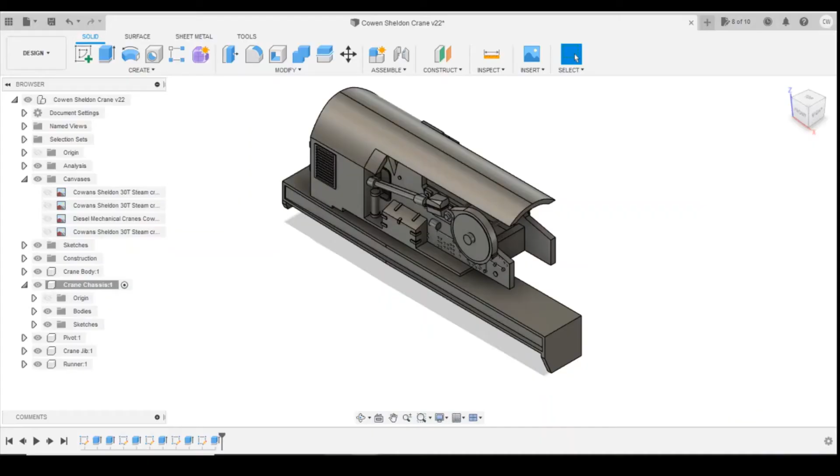So if we jump into Fusion, we'll scroll this around to look side on. We'll make sure we've got this radio button checked for crane chassis, so we don't make that mistake again, and we'll look at the plan we've got here.

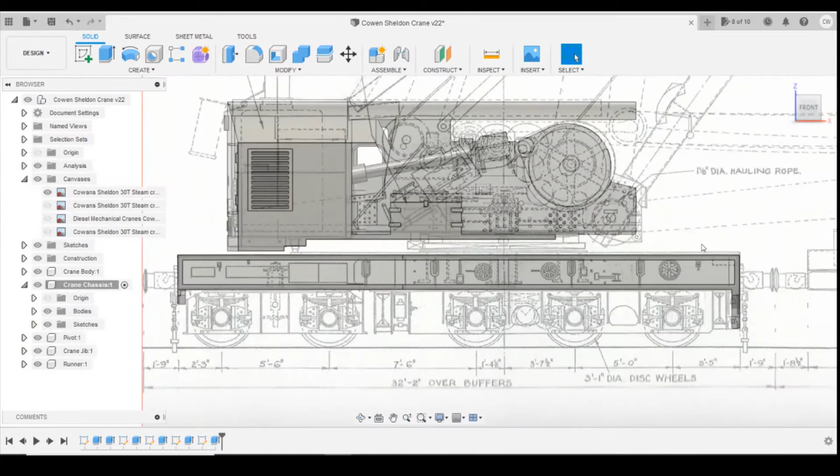On the plan we can see there's one of the supporting members here, looks like there's another one here, but the one at the front doesn't look to be drawn, or if it is, it's potentially this one right at the very end. But looking at the pictures, it's actually offset by about a foot, so I don't think it's drawn in the right place, or if that's it at all.

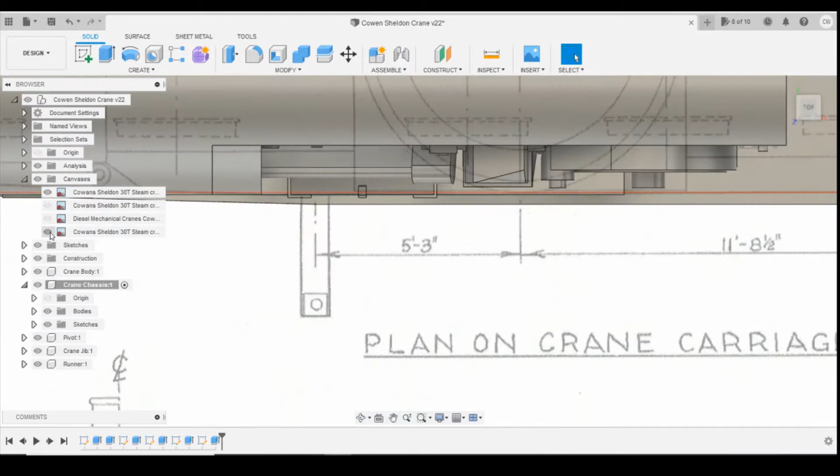One thing I am going to deviate slightly from - if we look top down, I think it was that one. We've got the position of our bend here. Actually, I'm not sure if it's in the right place entirely. I think it might need to be further back, because I think it's going to probably be starting about here where that support member is, and this position here I think is actually the jack.

So I think I'm going to have to go back into the sketch and just change this. I'm going to roll this back slightly to... I think it's this one here, yeah. I'm going to edit that sketch, just reduce this down. Let's try 22mm.

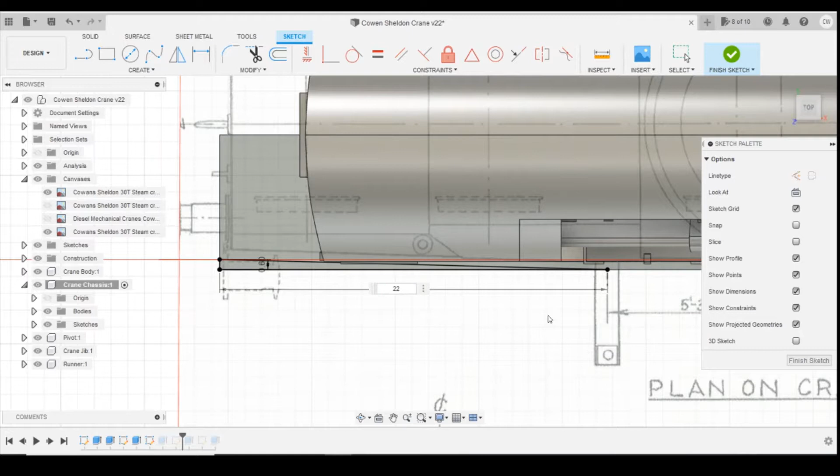Everything beyond that point should still be fine because this is still staying in the same place. I think by moving that back, that enables us to have this beam here in the right place, because looking at the pictures, it definitely doesn't look like it's bending at that point. I think it's slightly afterwards. So I'm much happier with that position.

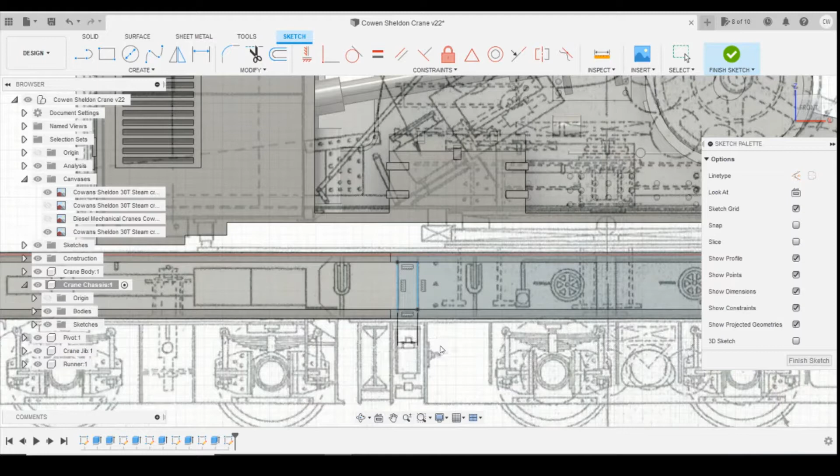So we'll start off by creating a sketch. If you look at the photos, they are level with the front, so we can just sketch on this front face here, and do a simple rectangle to fill these in. So there's one there, and we'll define that as 1.1, and the distance from there to there as 1.35.

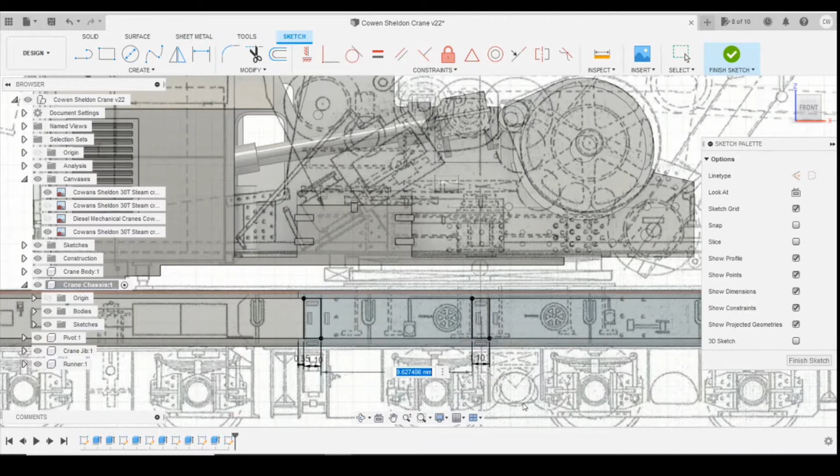We can draw the next one, I think is here, and define that 1.1 again. As I say, on the last one, we're going to have to just work from photographs, so it looks like it's in line where the jacking post is, about this sort of position here.

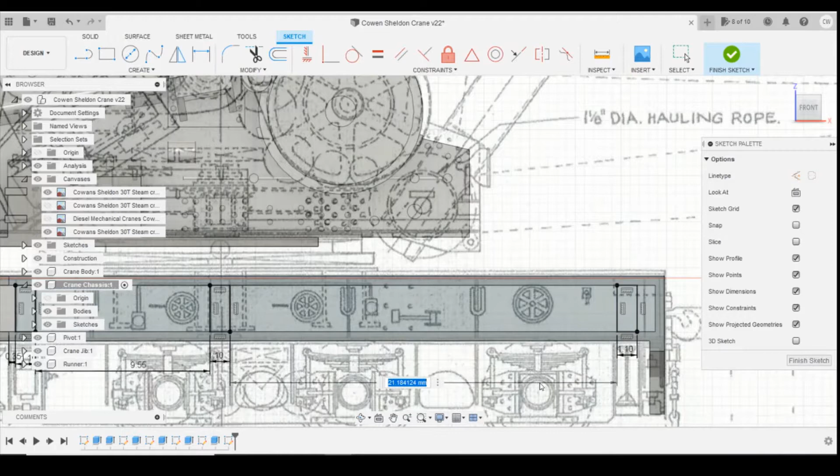So if we just draw it roughly there, define that 1.1, and define its position relative to that one, 21.2. Okay, so we've got the three posts there.

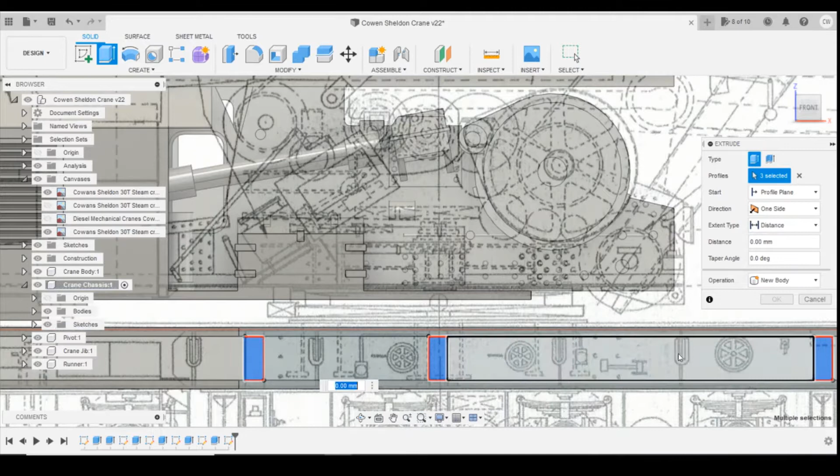If we just select the faces and then extrude to the back plane here, they will automatically... select that, don't want that, to the distance to - let's keep doing that - join. Doesn't really matter too much about distance as long as we go further than 0.8. For some reason it keeps wanting to select this profile. Not sure why.

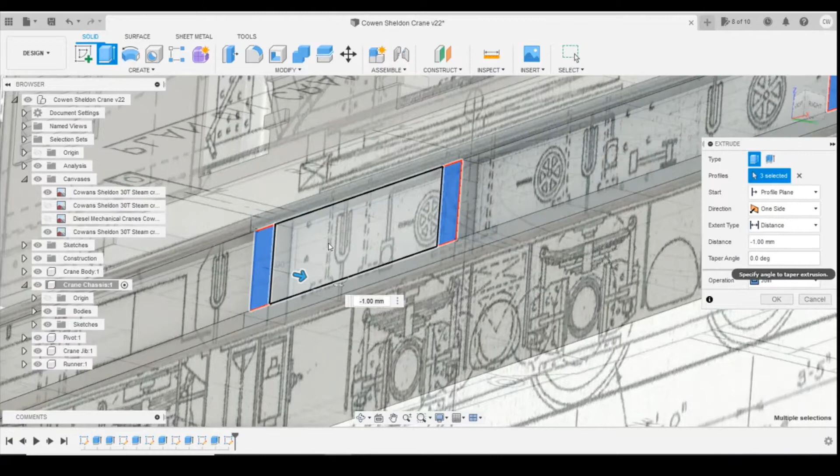Okay, so if we turn these sketches off, we can see what we've got now - we've got those three upright supporting members. Okay, so the next thing is we've got these shackles with a post coming down with a little cutout.

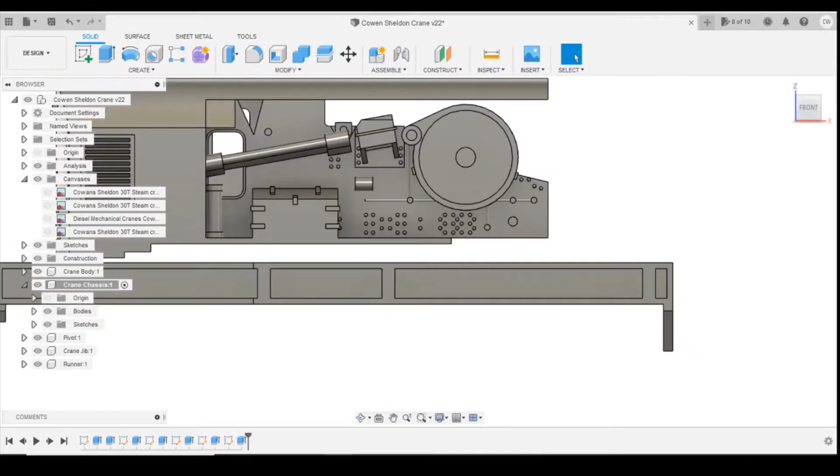So if we have a look on the plans, we can see where they are - 1, 2, 3, 4. This one shouldn't be too much of an issue, although it will come out slightly. We might have to do something about the front edge of it.

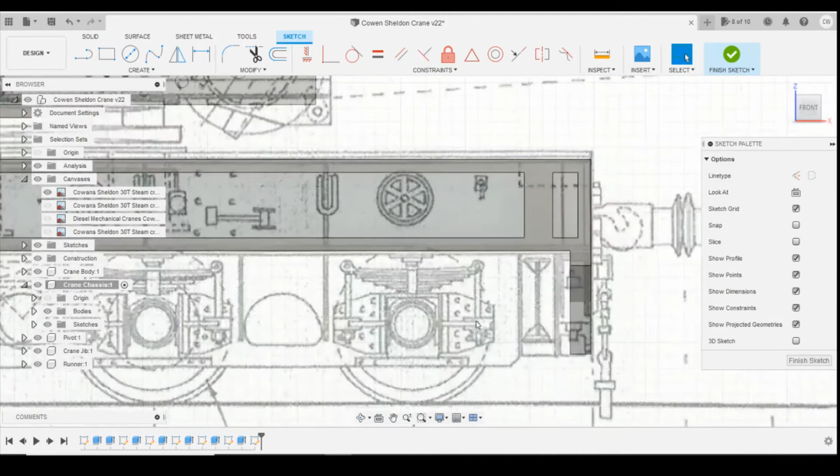So we'll create a sketch on this inside face. I'm going to create them as new bodies when I draw them, so that it can pattern across the whole of the feature, including the shackle. If we draw that down, look at the width. So I'm going to draw them as 0.3.

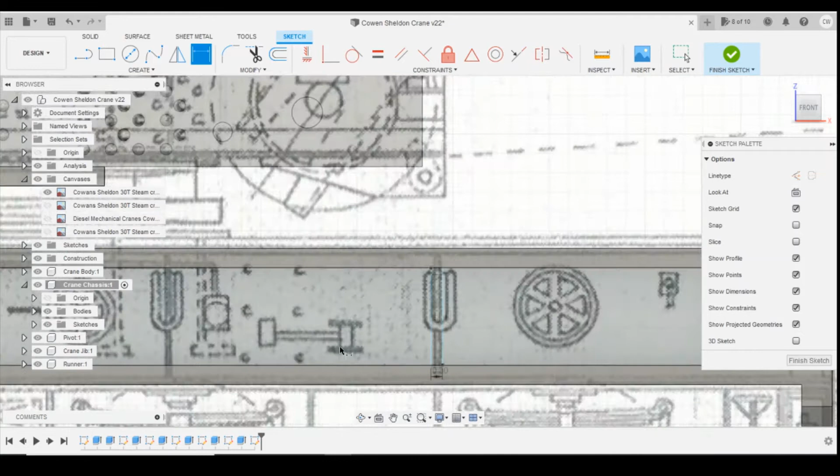Let's define its position relative to the end plate, because that end plate is not going to move, I don't think - 10.15.

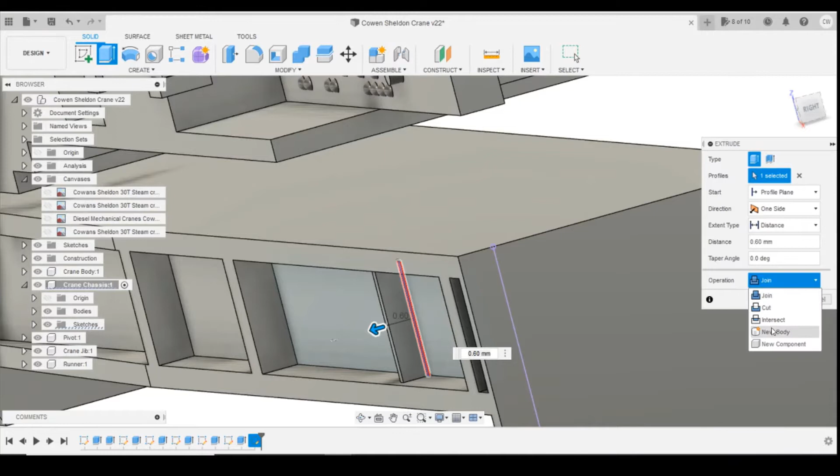And if we extrude this forwards, let's turn this off so we can see what we're looking at. We're not going to come all the way forward, so instead of 0.8 all the way forward, we're going to go, I think, 0.6. And then I'm going to create that as a new body initially, and we'll combine these afterwards once we've done all the details on them.

Because what we can do now that we've got it as a new body is if we turn that off, and turn this crane body off as well, we can now see that we're looking side on. We don't have to look through any of the other features as well as we draw this.

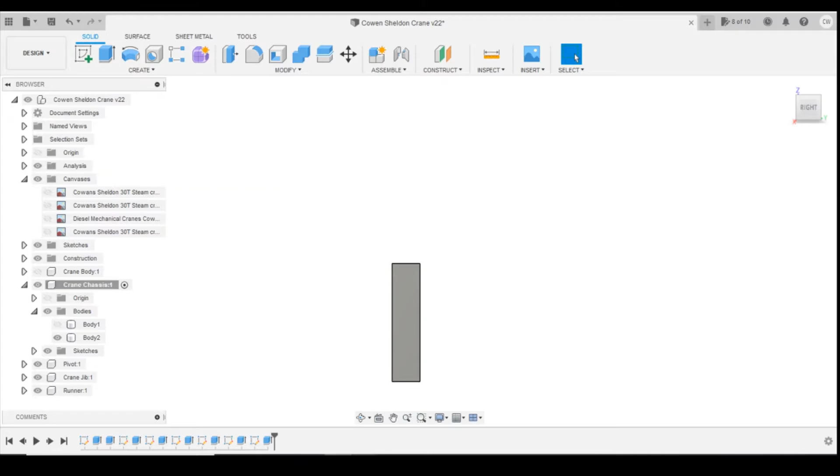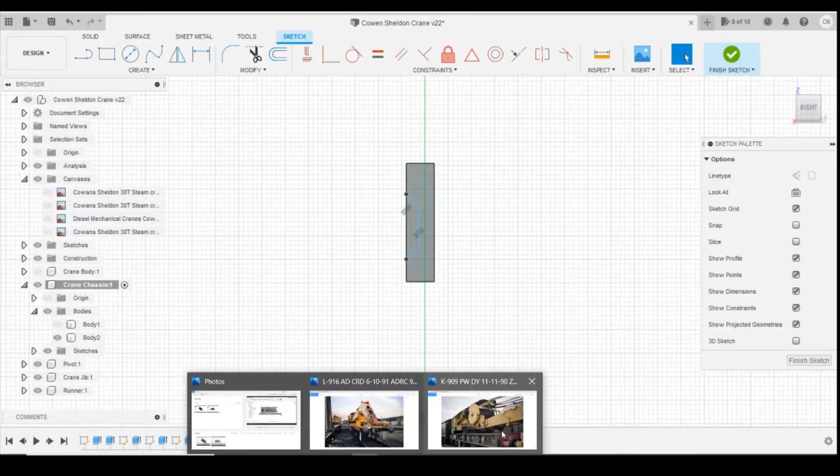Let's create a sketch on the side. I'm going to recess like this, I think. Really difficult - we haven't really got any sizes, so we're just going to have to do it by eye.

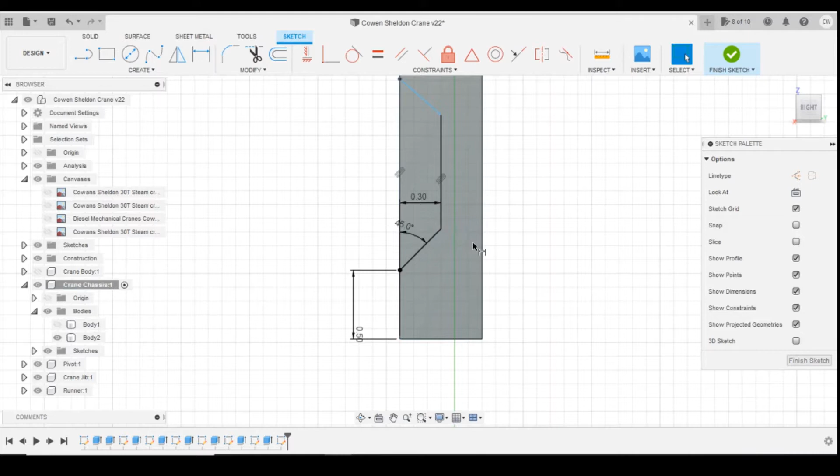Define distance from there to there, 0.5. Let's define that distance, 0.3. And then we'll look at the angles, 45 just so it's clean and easy. 45 at the top. And then define that.

Okay, so we can then extrude this across. So we've got that recess now.

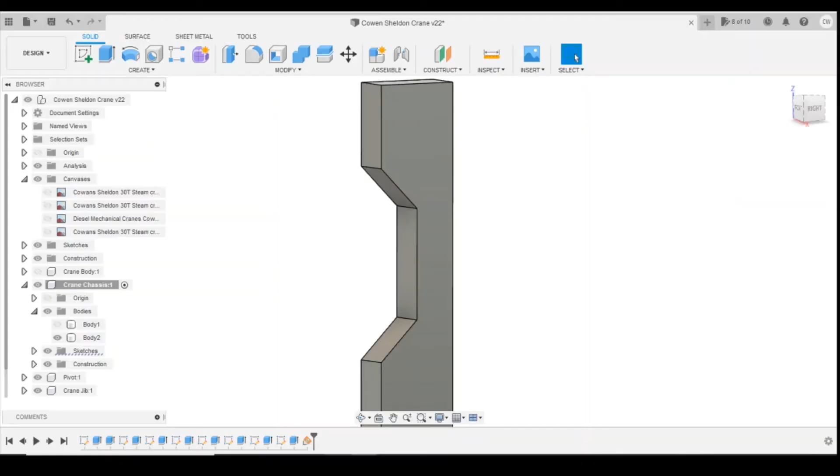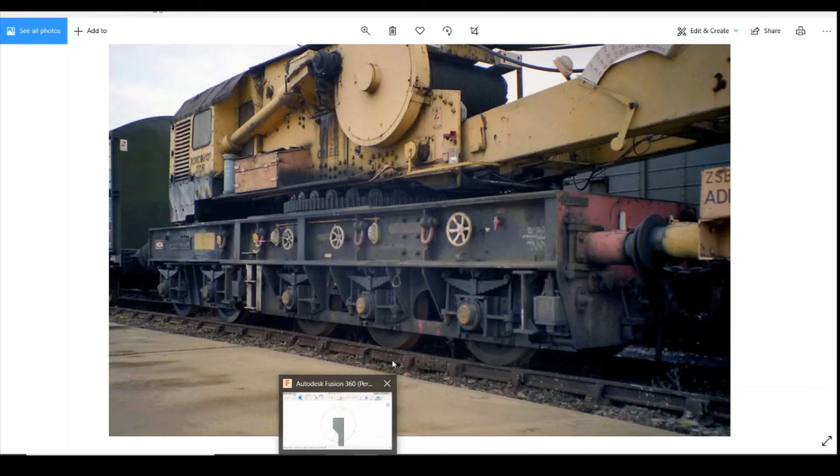Okay, so the next thing we need to draw is the D shackles. So if we just jump back into Fusion, they're in this position here. So we'll create a sketch on this face initially. So the initial circle shape looks like it's quite a large one to start with. I think it's like a smaller bolt through the middle, so it's probably going to be about 0.5 millimeters.

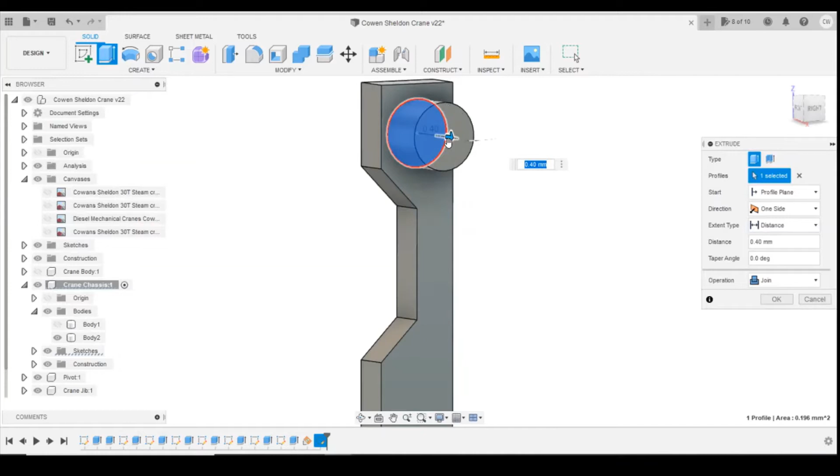And we can extrude this forwards, about 0.4, maybe 0.5 millimeters. Let's go 0.5 because we've got to get the D shackle to come round. So I'll do 0.5, and then we'll mirror them across in a second actually, because we'll draw a small one first, and then we'll mirror it.

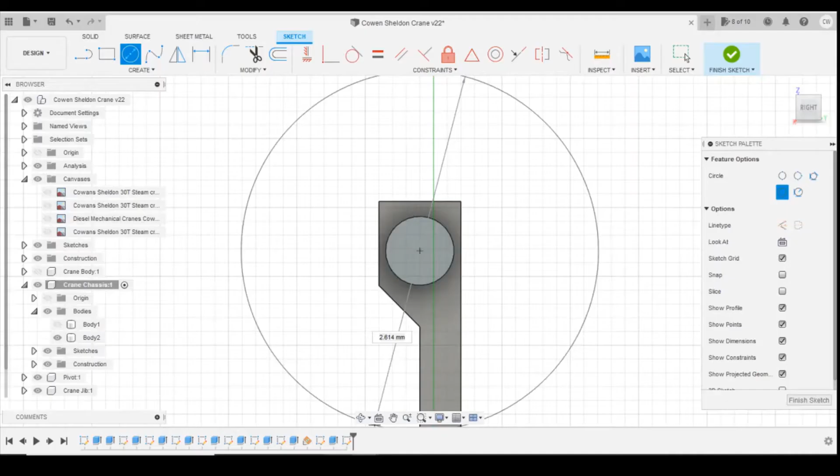Draw that one the end, small circle. How small does it look? About 0.25, about half the diameter. And we'll extrude that - it doesn't come as far forward as looking at this. I'll just bring that maybe 0.2.

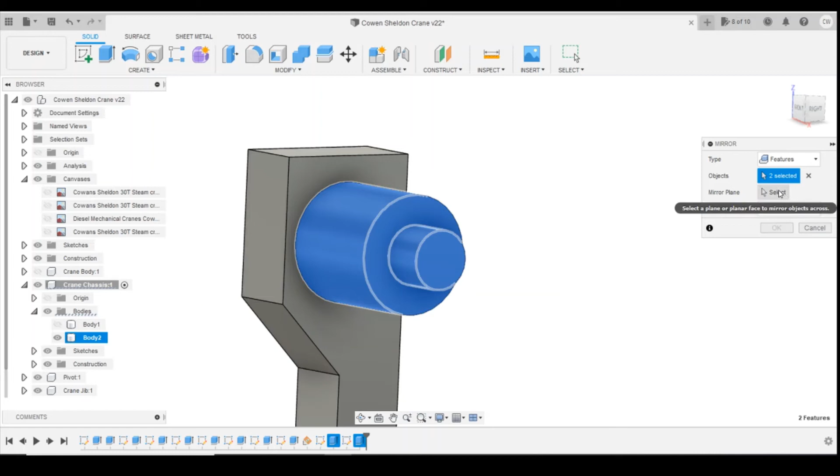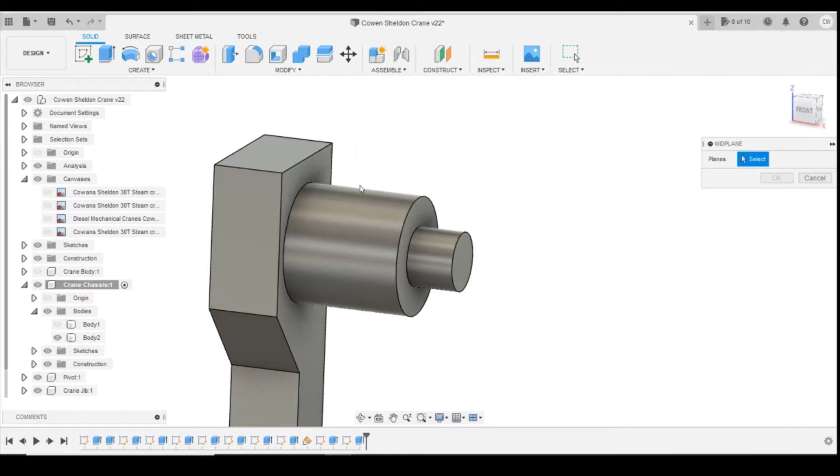And then if we do mirror those two features, take them to features, and then put it onto... we need to put a mid-plane. Cancel that, we put a mid-plane in here first. Construction - mid-plane between there and there, and then we can mirror those across.

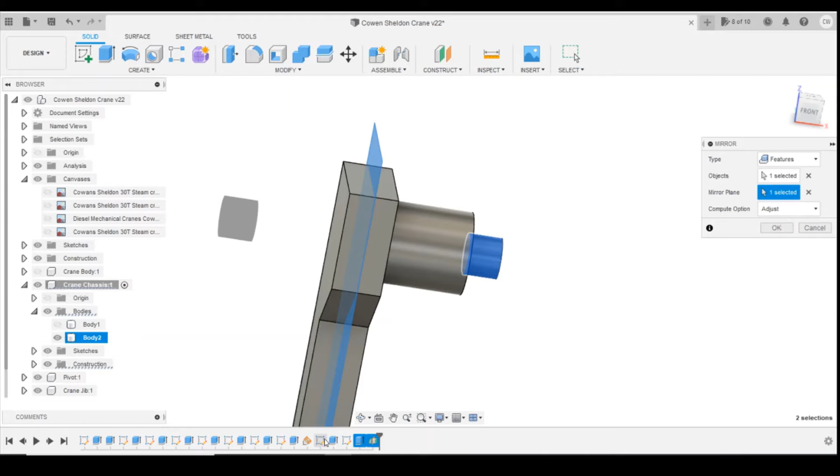Okay, so we've now got that. Turn the mid-plane off. Next thing is we need the shackle to come down and round.

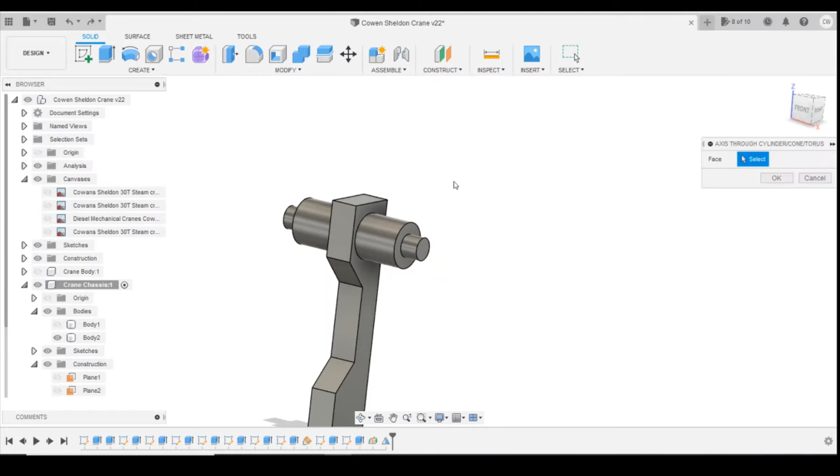Okay, so the next thing we need to do to draw this shackle is we're going to use a different construction plane to what we've done previously. So we're going to use axis through cylinder/cone/torus, and then we select the face of the cylinder, and that puts an axis all the way through the center. And then we can use a plane and angle from that axis point, and then rotate that round, so we know that anything we draw is going to go from the center point downwards.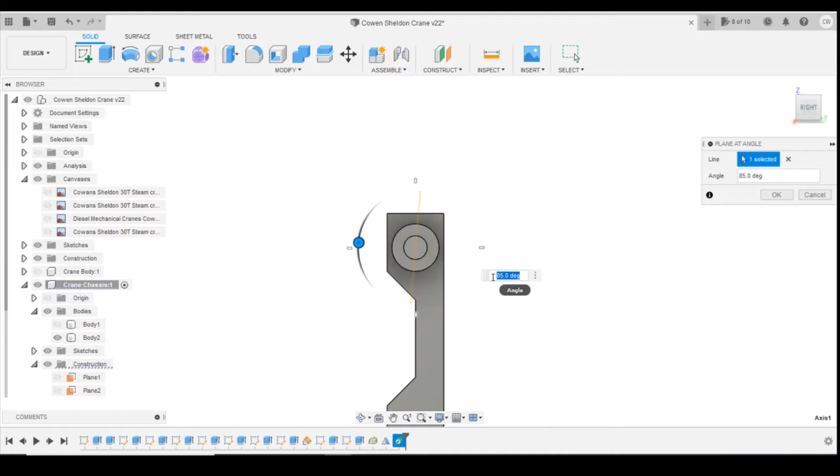You see the angle, I'm going to go for about 85 degrees. We may change this, but we'll start with 85 degrees to have the start point. Click OK with that.

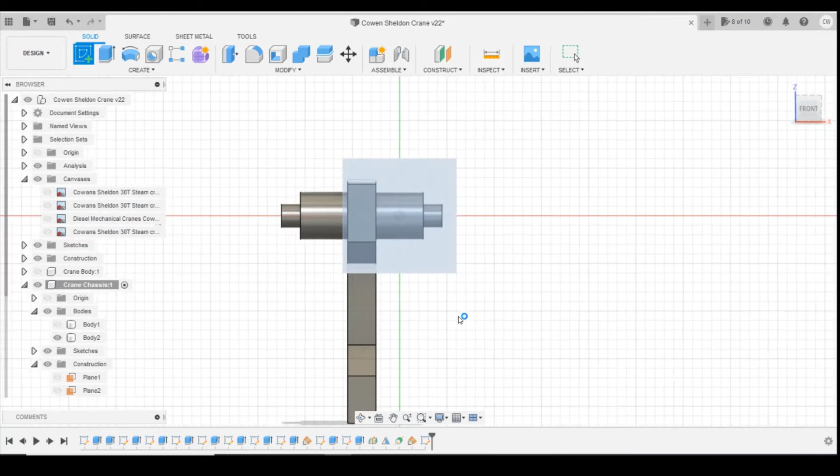Yeah, so looking at the picture now, the shackle doesn't come all the way down. There is definitely a gap at the bottom, so we can use that as a guide as to how big we can draw. So we'll create a sketch off of this plane. It's already put in the center point here, which is great. That's helping. What we're going to do is draw a line down.

And then we need to work out the distance from there to that base. That's 0.25, which is good, because then we know this is 0.3, so we only need to be 0.55 across here. 0.55 there, yep, and then add another 0.25, so 0.8. Just the midpoint there.

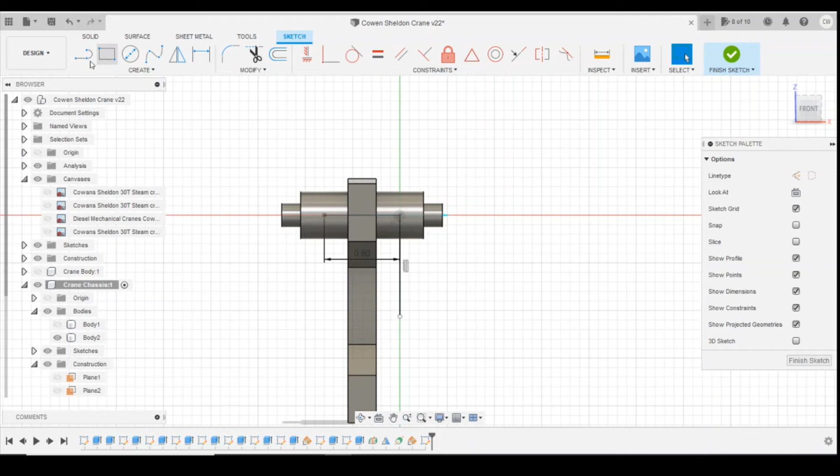Good, so then we can draw that down to the same height. Define that down as 1 millimeter. We'll do the same 1 millimeter on the other side. Okay, and then we need to have an arc that goes between the two.

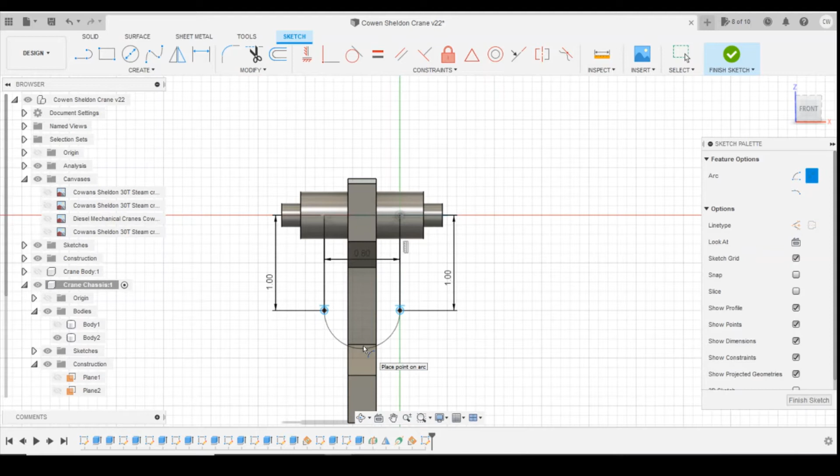So we can use a 3-point arc, let's see how that looks. So it's putting tangent positions in as I drag this down - it's snapping to tangent.

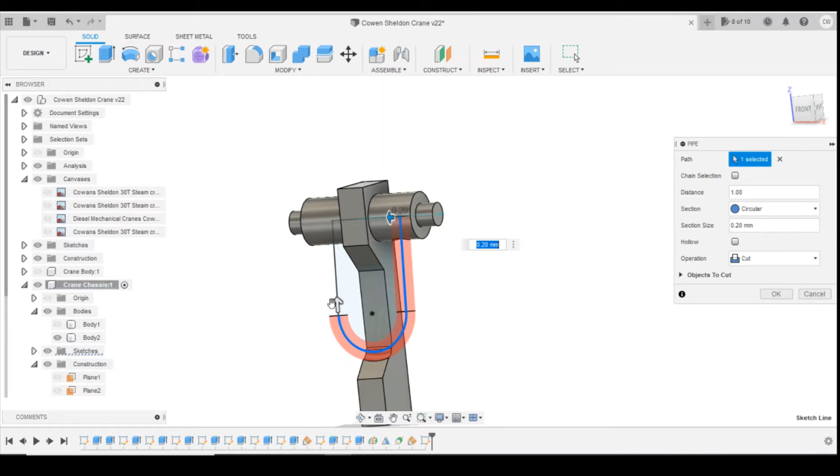Okay, so I'm going to go with that for the moment. Next I'm going to use the pipe tool. I don't want chain selection, I'm just going to go around the 3 sides like that and tell it to join.

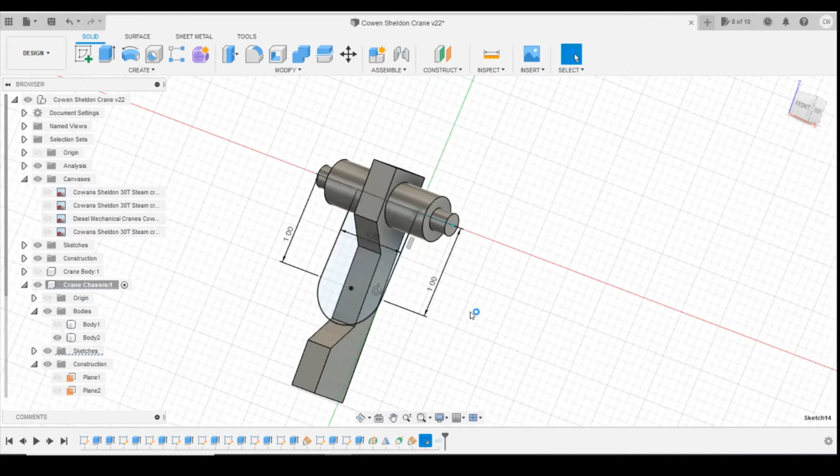I'm going to increase this, I think, to 0.35 because I want it large enough that it's going to be chunky in print. Now you can see that's probably too long, so if we come back into the sketch, let's change these to 0.8, that one's 0.8 as well. Okay, we've got a gap there.

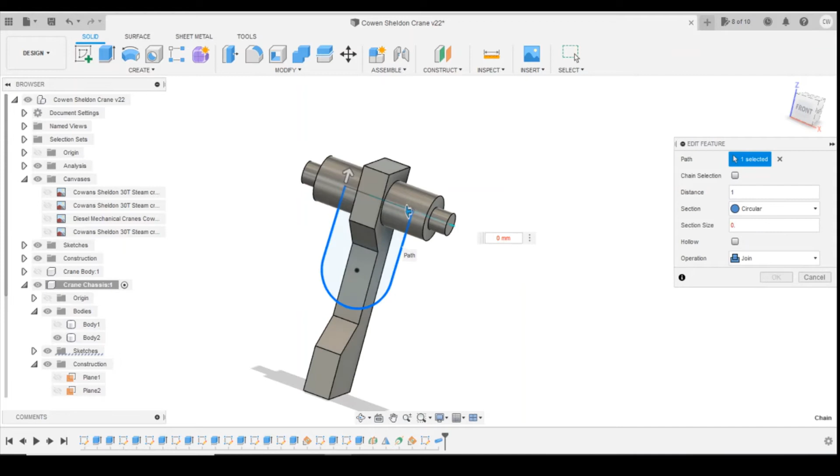0.35 could be too big. Let's try changing that. It probably is too big, it's probably overscale. Let's go 0.25. Okay.

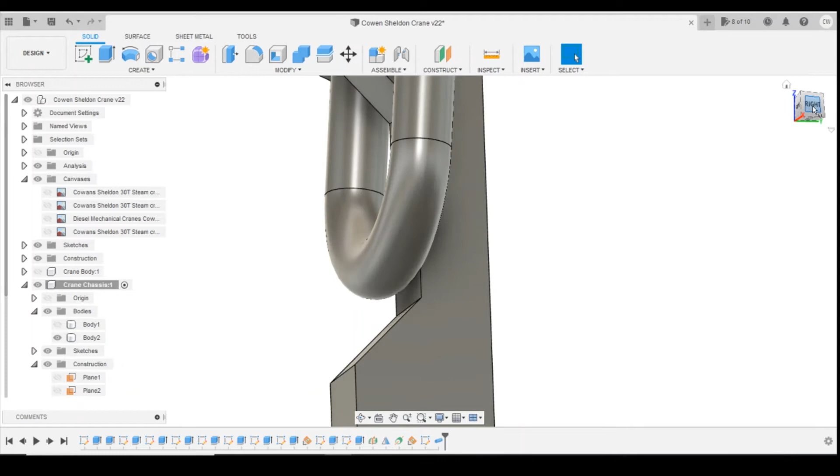So that's drawn. It could become an issue when it comes to printing it because you're going to have this bit here as an island. So I'm wondering now whether it might be worth making it actually just dig into here so that it will print better and then it won't need to be supported. Now it won't look as defined, but it probably means we won't have to support it, which will mean this actually looks cleaner as it comes out.

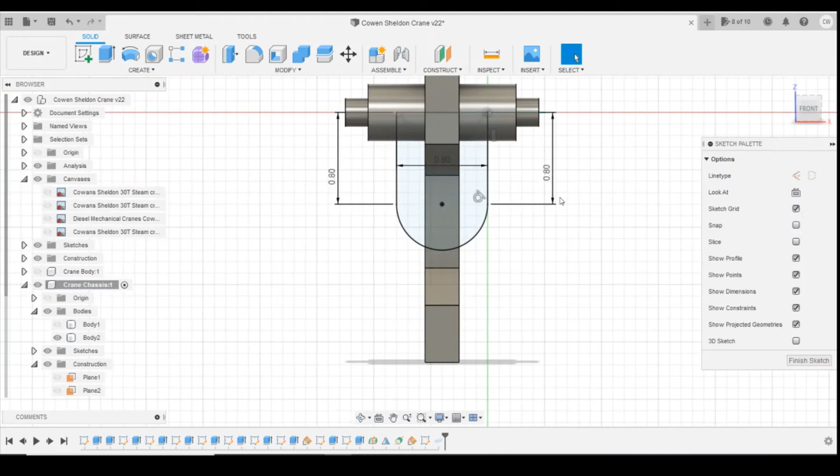So it might be worth going back in here and just changing these back to 1. And 1 there. And as that's now touching here, when that prints, because that will be supported, it's not going to have an island. Yeah, I think that's what we're going to go with. I'm going to go with that one.

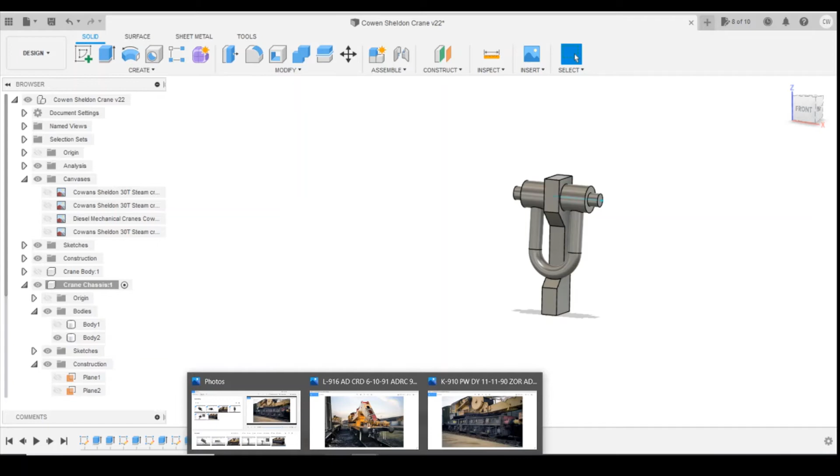Okay, so if we compare this to the photograph, we're not far off, really. These may be a little bit long, but if we do them shorter, this gap will be too small. It'll just fill up with resin. I think we're going to go with this.

Let's have a look at how it looks with the body attached to it. That looks actually not too bad. So we'll pattern these across now.

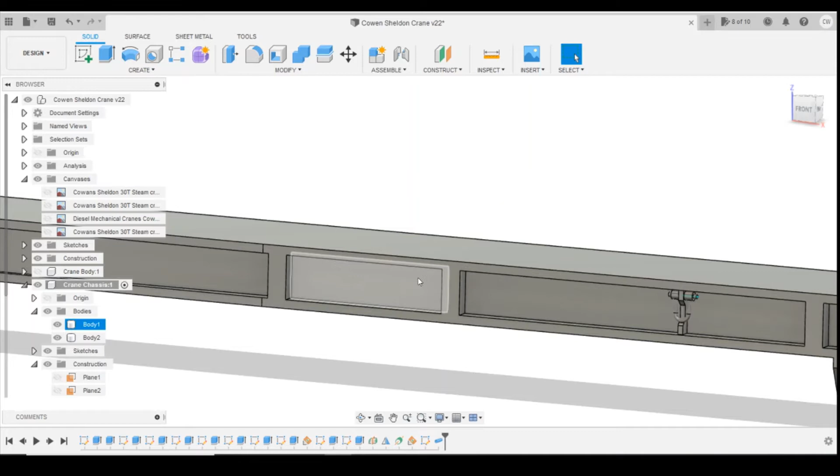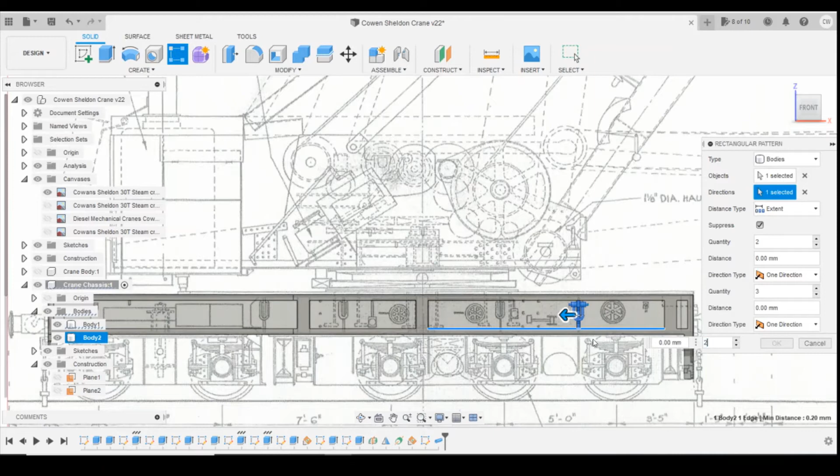So if we bring that initial drawing back up, we can do the rectangular pattern, and we can do features, and then actually if we do bodies, then it will do the whole of this body here. So if we select that one there, we can select direction and just change it to just 2 of them. Okay, so you can see that's there.

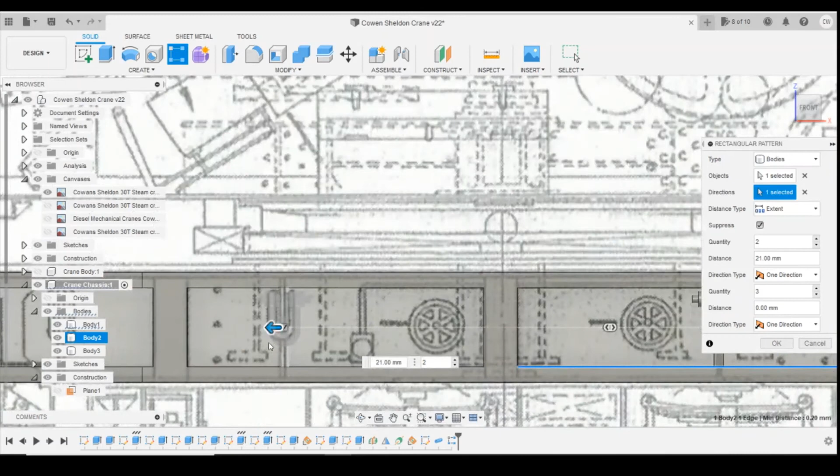Yep, I'll do the same again, make sure it's set on bodies. Select body 2, direction's the same. I need 2 of them. That position actually looks quite good there. And we'll do 1 more.

Now you can't do them all at the same time because there's a difference in spacing. So you have to do them like this individually. Direction, and then across, 2 again.

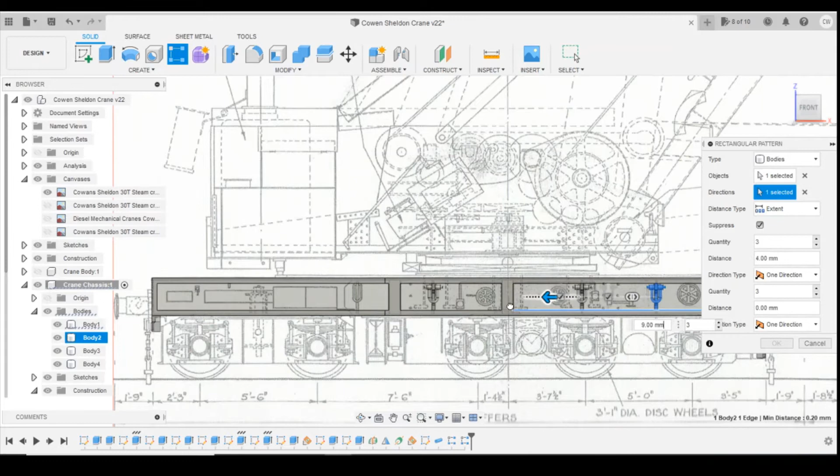Okay, so now we've got our 4 shackles there. What we want to do is get them to join to the same body so that they're all sorted. So combine tool, target body is body 1, and then tool bodies. We hold shift down as we select 2 to 5. That then joins them all, keeping them with body 1.

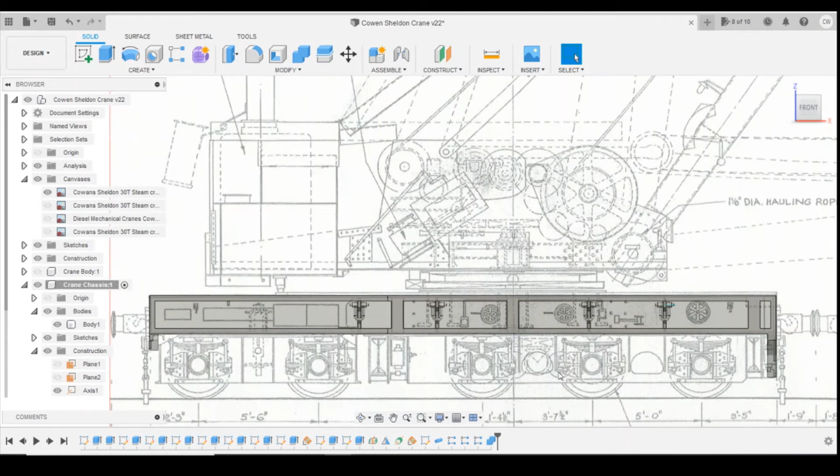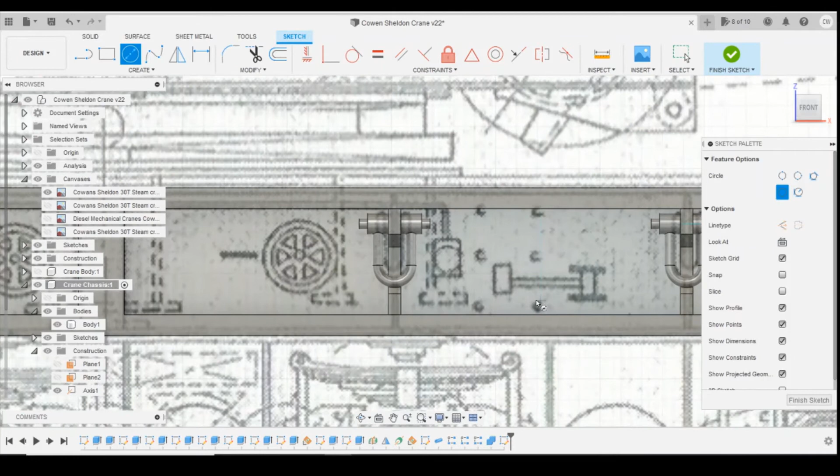Okay, so the next thing I draw is the rivets that are here. So we'll create a sketch on this face again, and we'll do the same as we did before, we just pattern them. So we can have it roughly in line. We can't have it in the right position because obviously we're going to have to overscale the sole plates here. So we'll have it roughly in the right position here.

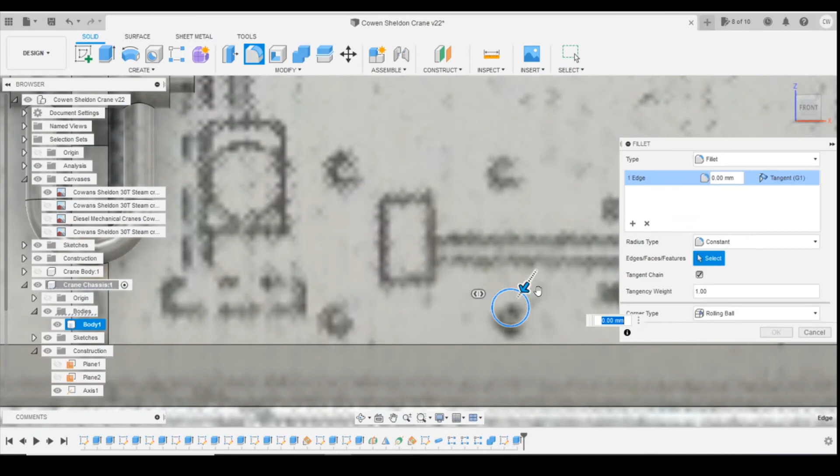So if we go to features, I'll select them 2 down here. Direction is upwards. So we can do 3 up. We're going to have to do about there, and 2 across.

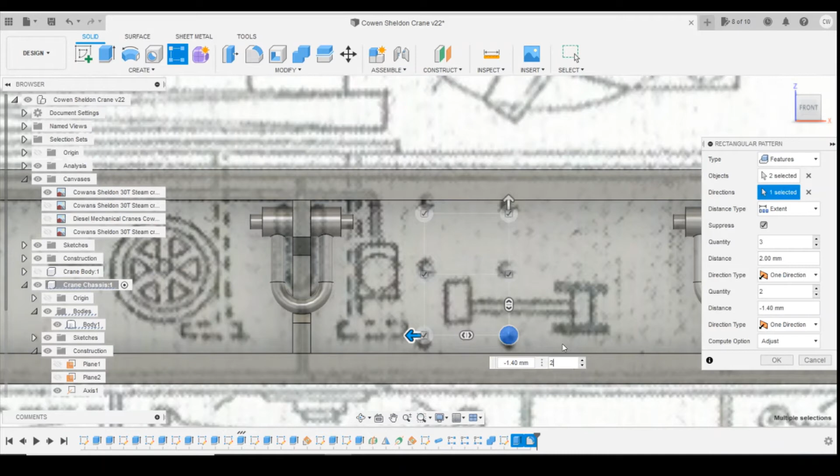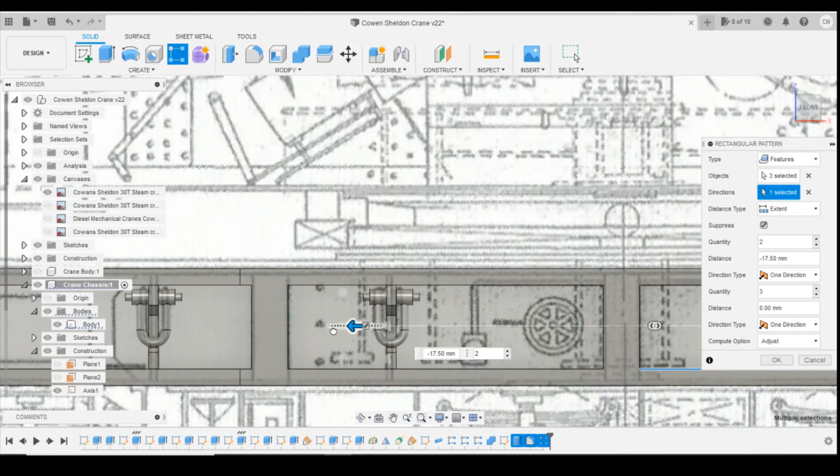Happy with that. The next one needs to be in this area, so we can use pattern of features, which includes the pattern. Select direction, drag that across. Again, they're not on the drawing particularly well, but if we look at the photo, they're to the side towards the jib end of the last beam we drew. So we're going to put them in here. We've now got those rivets drawn.

Now we're looking at these bits of detail with the light and the electrical conduit. I'm actually thinking I'm not going to draw the electrical conduit because I think it's just going to get lost in the sole bar. We've already got quite a bit of detail going on in here, and I think by the time it prints it's going to be so small that it won't show. So I am going to put the lights in though, and I'll put this box here just so we've got the relief from that.

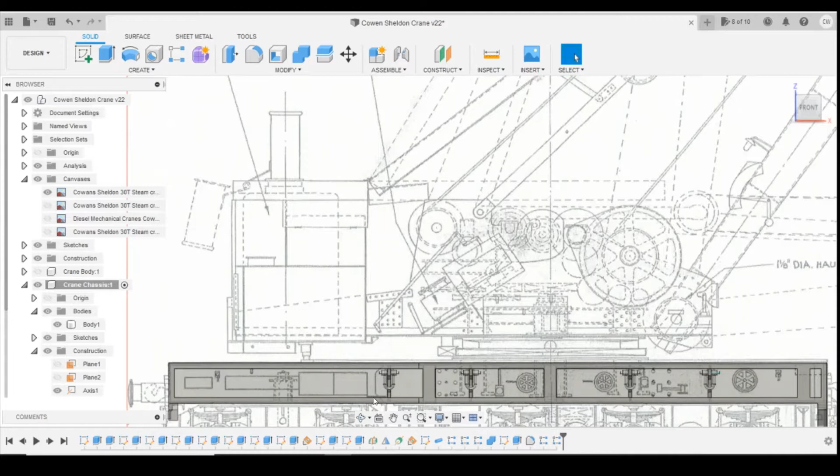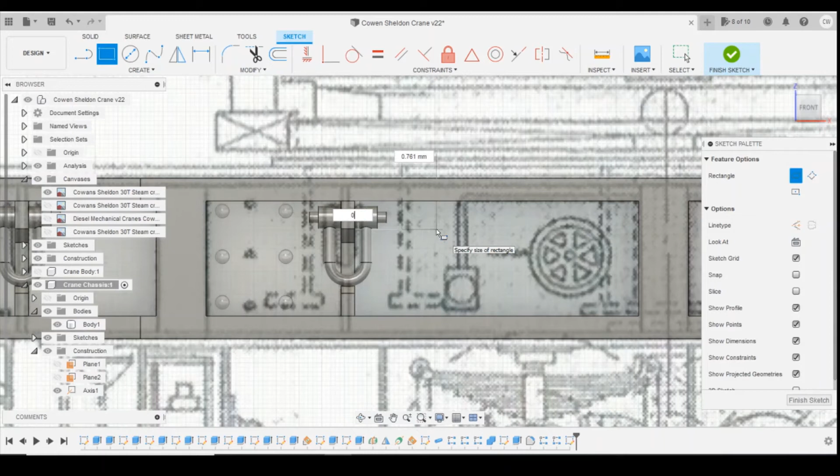We'll start with a box, which we know is next to the second shackle along from this end, and it was on this side of it. So create a sketch on that face. It's going to be pretty much right at the top. I'm going to just create it, going 0.6mm square. Yeah, we'll go with that. Extrude this forwards, I'll come forward 0.5mm.

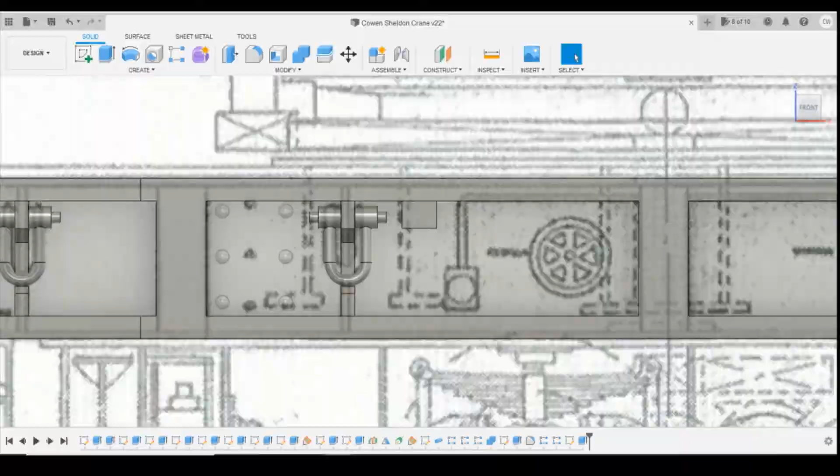Next to it, slightly lower, we've got a light. Now we know we can copy these over. So if we go back into here, put a sketch on there. We'll start with a rectangular shape. Let's call it 1.2mm. In fact, let's not define it because I think we're going to curve off the edges. Yeah, they're all curved, so we'll then hold down, select, we select these.

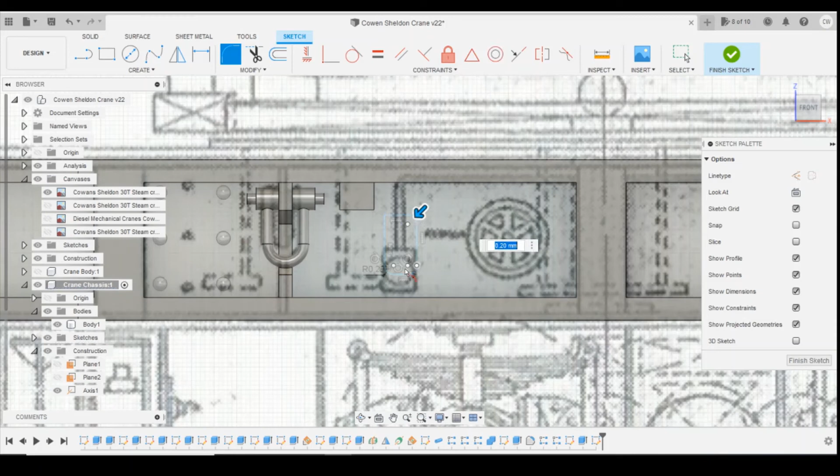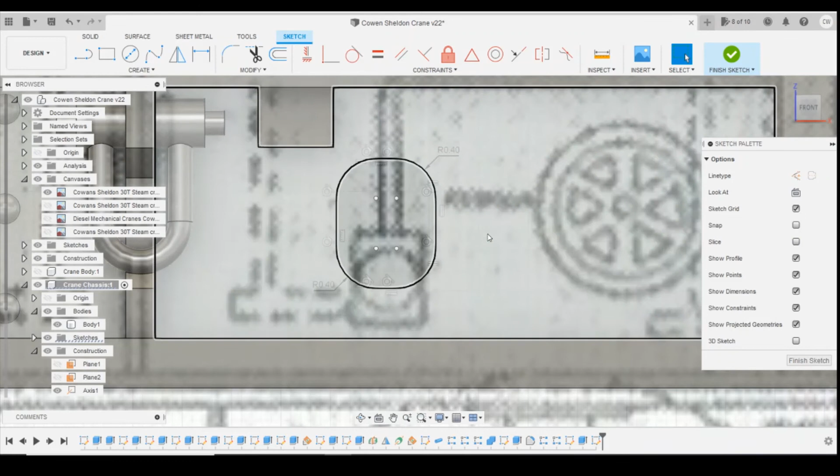Let's change that to 0.3, 0.4. And we'll do the same on the top here, 0.4. Define distance between them, 0.8.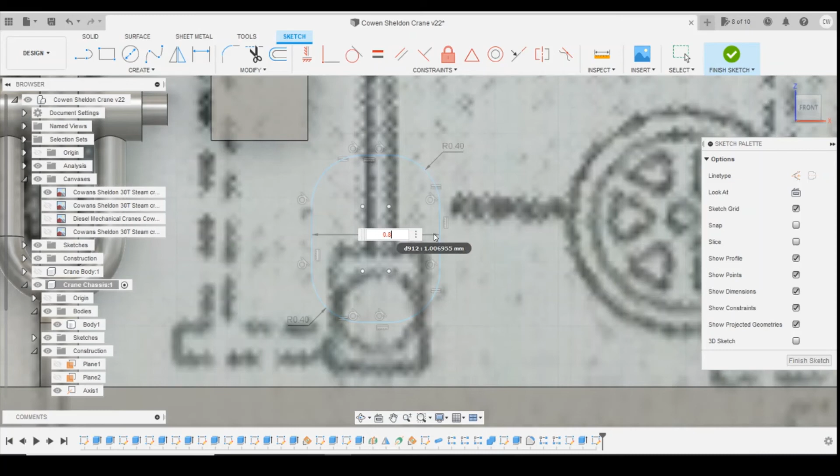Because that - why has it done that? Weird. Constraint is looking - I wonder which one it is. Yeah, okay, 0.70. Yeah, okay, so that's going to give us the tiniest little bit up here.

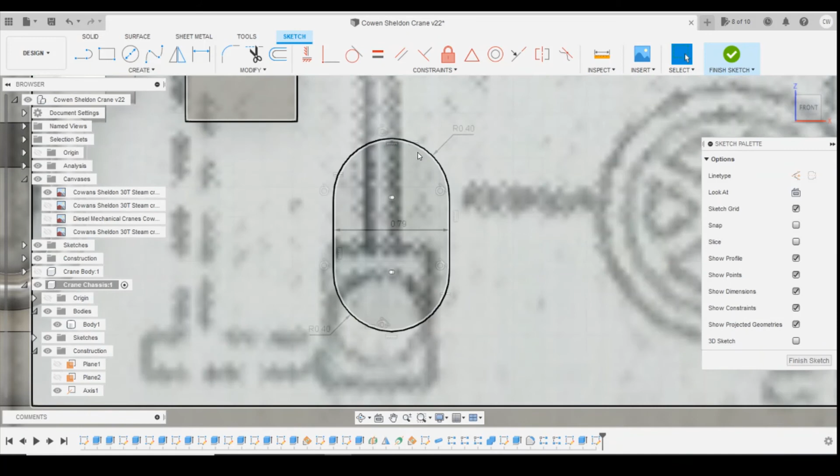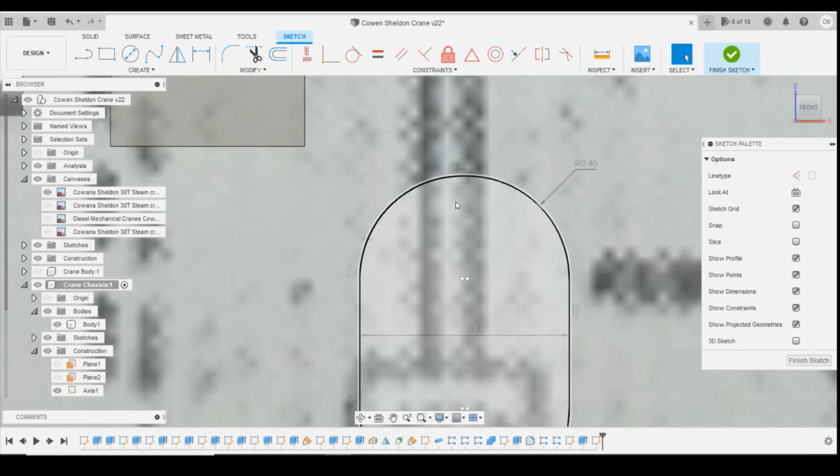They're overlapping now, there they are. Let's go in 0.7 - nope, double way. 0.8. Yeah, they're not overlapping now, that's what we want. 0.82 there. Height wise, we'll go from top to bottom, 1.3mm.

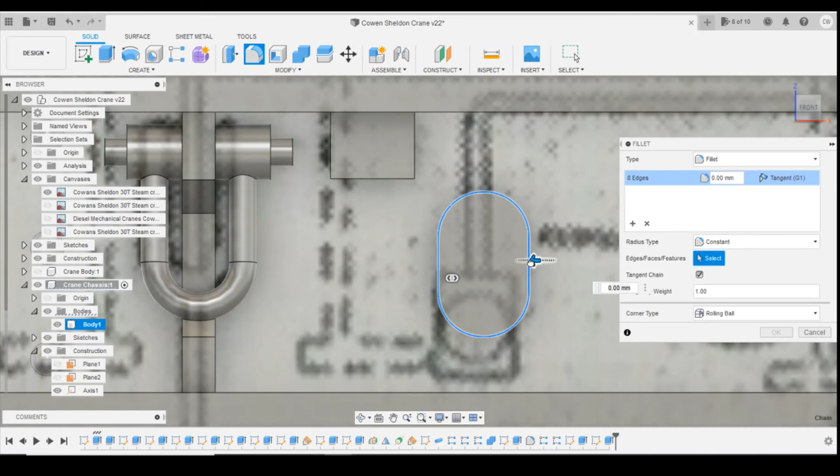And then we can extrude this forwards, come forward 0.6. If we look at the shape, they're also domed inwards as well, so we can do fillet, make sure tangent chain's turned on, and drag that in like that. If I turn this canvas off, you can see the shape that we've now got. It sticks forward slightly, but it's all rolled in top and bottom.

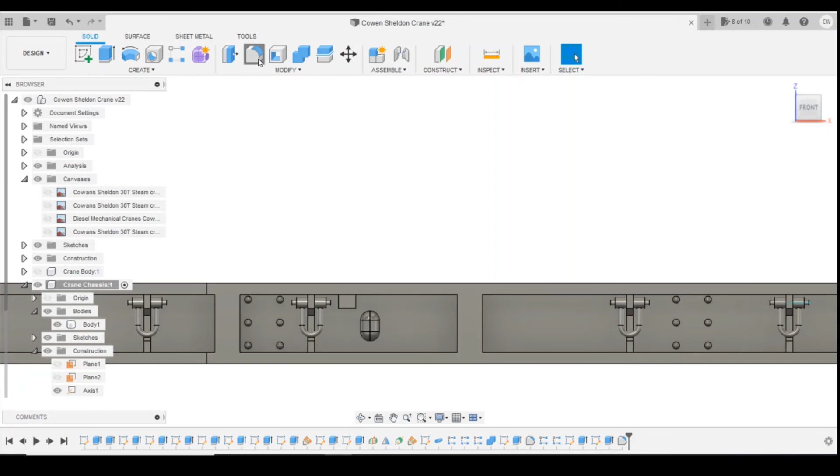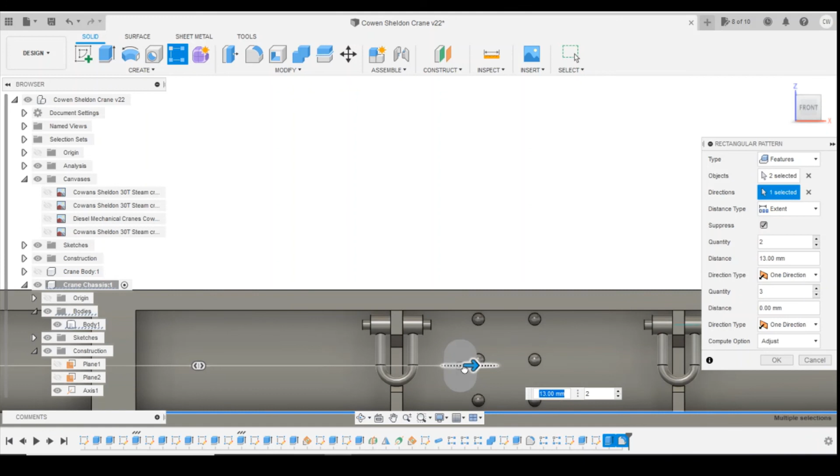Okay, so we've now got the lights. Now realistically on this, detail wise, the last thing you've got is these three handbrake wheels potentially. Now you've got a choice really: you can either draw them onto the body, recessed enough so that they're not going to have any islands, because they'd be too difficult to print floating. I think it would just break apart because it's only going to be about 1.5mm across, and this one's probably only 1 millimeter.

So the detail wise they'd be pretty small, so you can recess it onto the back plates here. The option I'm going to take is to leave them off, and then potentially look at seeing if I can get some extra brass ones to put in place, which I think would give a better, cleaner look there. Detail wise, I think we're pretty much there on the detail.

I think these are builders plates. I think they'd be better to do those as transfers rather than trying to have a raised feature, because the text is so small anyhow that it wouldn't print particularly well. So I think they're going to probably be better as transfers.

I'm not sure what these two little white things are. They're potentially some sort of stopcock or something, but again, detail wise they're quite small. I don't think you're going to notice them if they're not there. I'm going to leave those off and say that we're pretty much done with the detail within the sole bar here. So I'm going to call that a lesson.